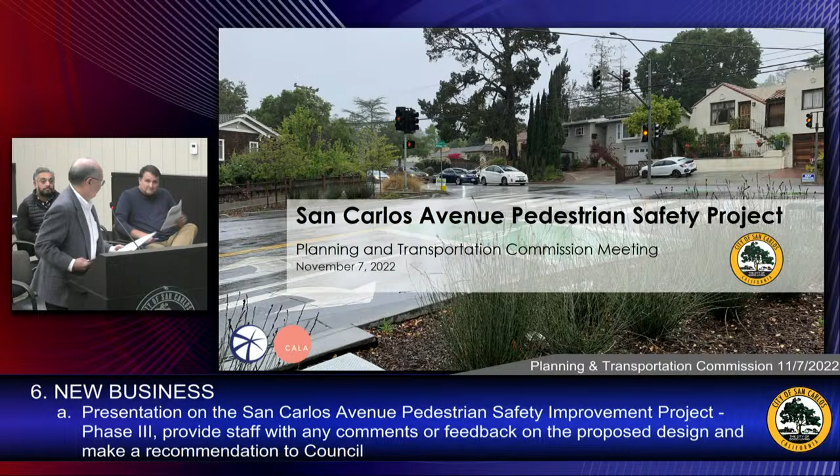Good evening, Commissioners. My name is Brian Fletcher. I'm a principal with Callander Associates Landscape Architects. I'm also a resident of San Carlos for now over, I think, almost 21 years. So it's been a real privilege for me to work on projects within my own city and my own community. So I'll walk through the project.

As you all know, this isn't the first phase of the project. There have been 2 other phases prior. But in general, the goals and objectives of the project were to increase pedestrian safety by providing a continuous public sidewalk along San Carlos Avenue, which wasn't there before.

And then to improve mobility for all community members. Sorry, I'm getting used to the new configuration here, I have not been here before. Improve the mobility for all community members.

So ADA accessibility, enhance the bike lanes, and then provide beautification enhancements where we can, whether that's street trees or stormwater planters. We have a responsibility to treat our stormwater before it goes into the storm drainage.

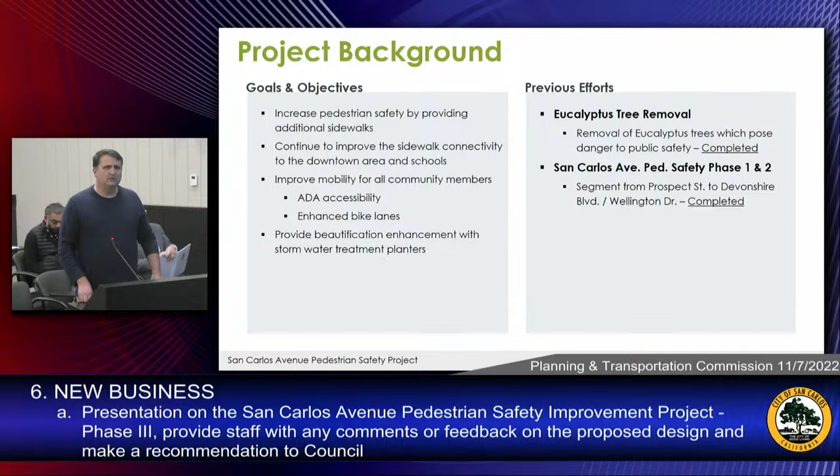So these are opportunity areas that we can not only provide the storm drainage, but also beautification as well. So as you're aware, this project has gone through multiple phases 1 and 2, but there's also been other work happening on San Carlos Avenue, multiple phases of the large eucalyptus trees that have been removed over time, and I believe we are now completed with those efforts.

So moving forward, the first 2 phases of the project: phase 1 was from Wellington Drive to Alameda. Phase 2 was from Alameda to Prospect, and those 2 phases were completed at the very same time. Those are completed out there today.

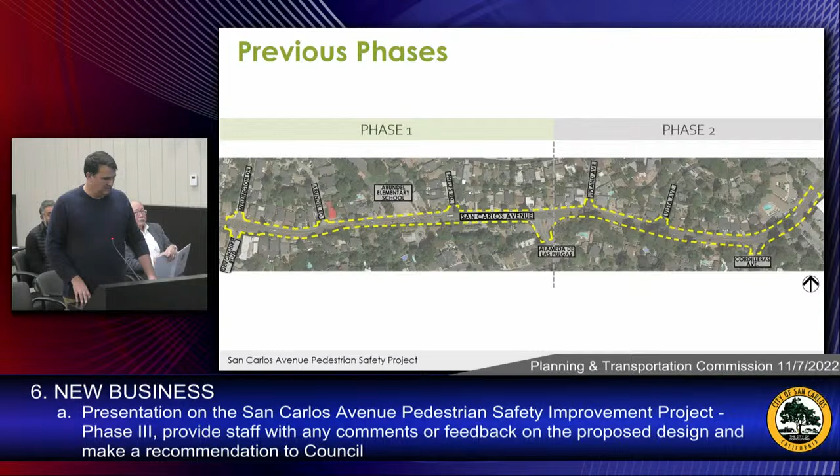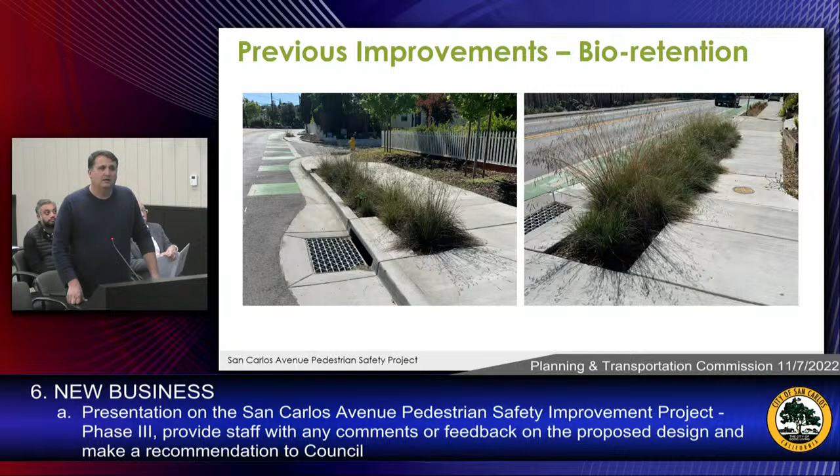And then here you can see some of the bioretention or stormwater planters that we were able to install as part of that phase 1 and 2 project.

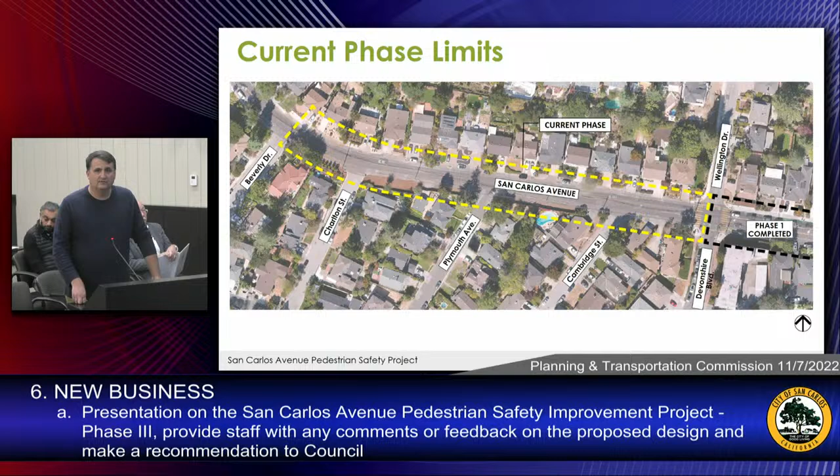So now it's time to take a look at the 3rd phase of the project, and the project limits are from Beverly to Wellington, to the limits of the previous project.

So how did we go about developing the plans that you see here before you tonight? Before we even started, we had individual meetings. We made the opportunity for people to have individual meetings with myself and members of your staff to begin to take a look at what the potential impacts would be and to provide an opportunity to provide feedback to us even before we got started into the first public workshop.

We also issued an online survey. We then presented some options at the first community open house. We took feedback and then made revisions and presented a second alternative at the second community open house as well.

We met with 12 individual neighbors. We had 62 respondents to the online survey, and we had 10 people attend the last community open house. We also anticipate additional meetings as we continue to refine the design moving forward.

So the overall response: most participants were very supportive of the general idea of the project, of improving pedestrian safety and connectivity along the corridor, as well as the improved bike facilities.

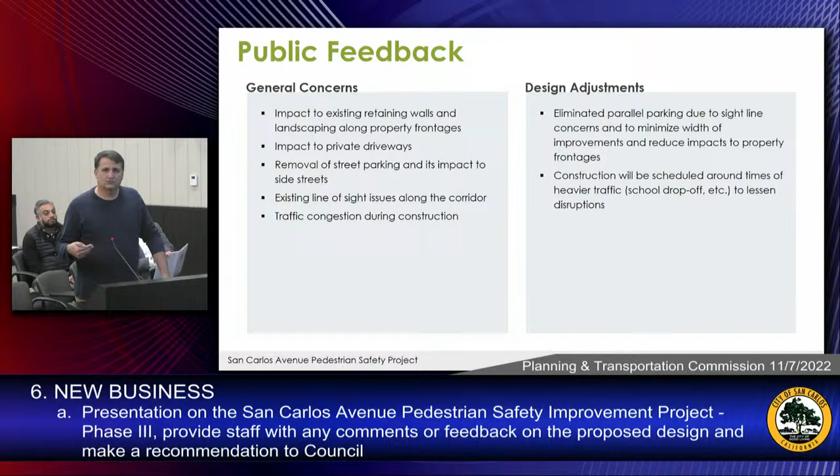The last general concern was how we're going to address congestion during construction. So we went back to the drawing board and made adjustments. We eliminated the parking that was identified there because of sight line concerns. As we move into construction drawings, we'll address congestion during construction through project staging and specifications to the contractor.

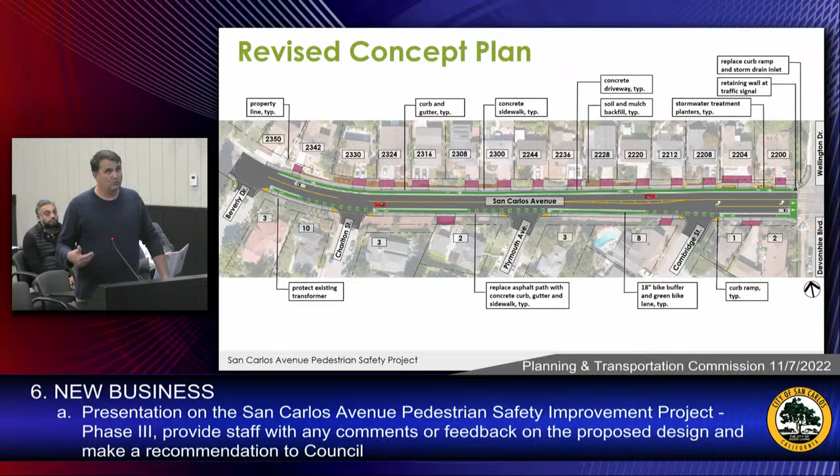Now, as I mentioned, we're going to be taking this into more detailed construction drawings, at which point we'll need to further refine the potential impacts and how we're going to reconstruct any walls that need to be removed to make way for these public improvements. We'll be taking a much more detailed look at the design of those improvements.

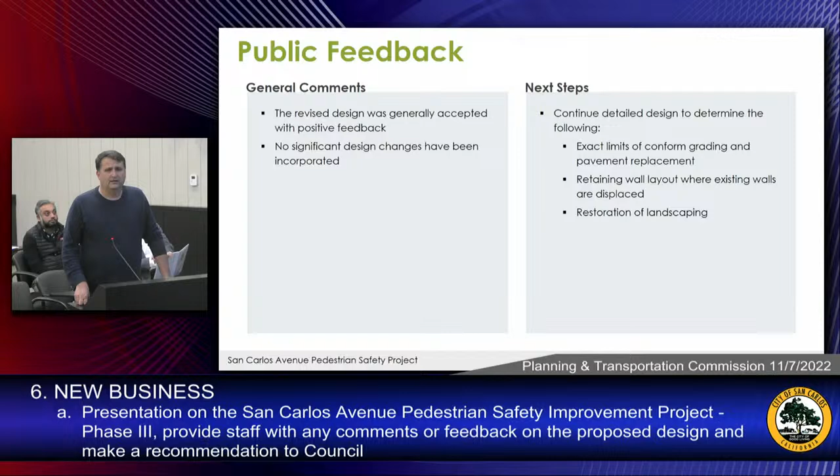So we did take it to the public, and the revised design was generally accepted without any significant design changes. As I mentioned, the next steps would be more detailed design - understanding and defining the exact limits of the conform grading and improvements to walls that would have to be removed, and then restoration of landscaping and such.

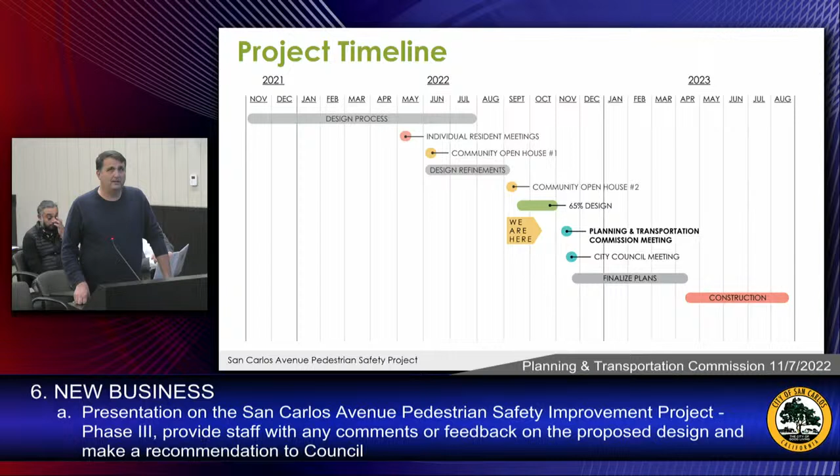So here we are with the project timeline. We're meeting roughly halfway or two-thirds here, trying to get approval on the design concept. We're going to continue finalizing the plans and construction drawings, and hopefully move into construction later next year, around April or May of 2023.

Do you want me to give this one? Or you can give this one.

I think as staff realizes, this is probably really your first opportunity to see this project. So we just wanted to get your input on the project itself - just again, conceptual. As Brian indicated, we're still in the process of finalizing some of the plans and looking at what we can and cannot do out in the field, but we wanted to get your feedback.

We really have done some extensive outreach to not only the residents who will be directly affected by the project, but also community-wide outreach to gain support from the community at large. We want to get your feedback and see what concerns you might have going forward. We'll take that information and present it to our city council, who will have a similar opportunity to discuss the plans and improvements before we finalize the conceptual or final design.

Thank you, Director, thank you for the presentation. That was very helpful. I guess I'd like to ask if there are any clarifying questions from the commissioners before we start a discussion. Yes, Commissioner Garvey.

Okay, thanks. To Commissioner Castaneda's questions, it looks like there are 16 homes affected on the handout, or at least 16 addresses are given, and I count 17 pink spaces. Could we go back to that slide? I'm just trying to understand. It looks like there are a couple of homes you maybe haven't reached to talk to them? Most certainly, there are a few homes that haven't reached out to us for individual meetings. I'm not certain they weren't at the public open house, either one of those meetings. But as far as personal one-on-one meetings, we've gone out to every single one that requested one.

And you said you left flyers for those who didn't. Thank you. Can you help me understand better what the pink on the diagram will consist of when the project is done?

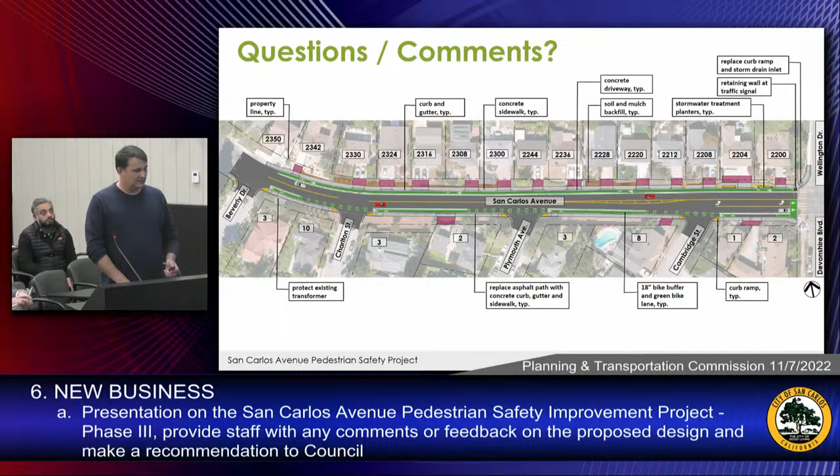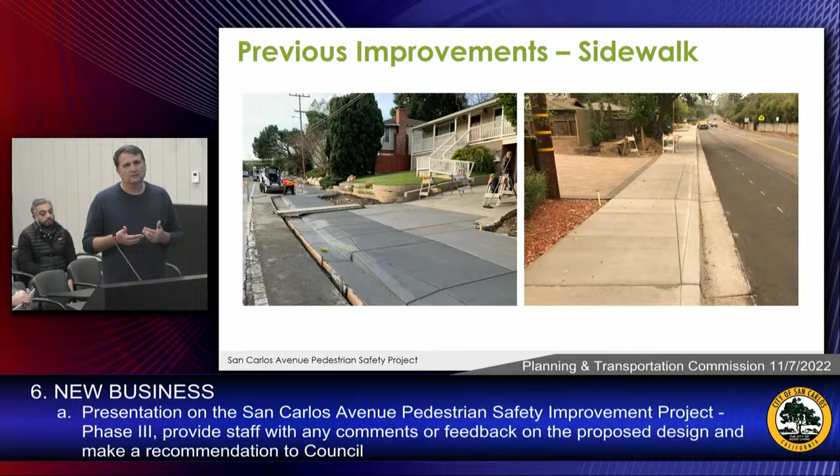Yeah, so the pink—I'll go back to one of those first phases. Do you see that image on the left? Okay, so the pink represents what we need to do on that driveway in order to smoothly conform from the existing driveway to the new limits of the sidewalk. We've got a lot of grade differences between the proposed sidewalks and some of these garages, especially closer to Wellington, so we'll be analyzing what's needed to make a smooth transition. The pink represents that conform area behind the new sidewalk that we'll need to reconstruct for the driveway. Right now it's preliminary until we get into more detailed construction drawings, but by the time we get to construction we'll have a good idea of the exact limits. Got it.

I just have a couple more clarifying questions. When retaining walls or other things erected in the right-of-way need to be removed, whose cost is it to remove those items? Just to make sure I don't misspeak—the project is going to take on the cost of removal and reconstruction, just like we did for Phase 1 and Phase 2, to put things back in general conformance with what's needed for grading. So it is part of the project.

I see. So, even though the owners have built in the right-of-way, the city has budgeted to make them whole and get the work done for them, in essence? Yes. That's very generous. Thank you, that hasn't been the case on other projects we've worked on. That's my understanding—the default isn't like that.

I have one more question related to Commissioner Garvey's comments. I know sometimes bike lanes have barriers of different types, and I wondered how the street dimensions or other factors led you to choose the buffered bike lane versus other barrier constructions. We have to look at how much improvement to the bicycle infrastructure we get and balance that with potential impacts to residents. We felt the buffered bike lane provides more protection and separation for the bicyclist than a traditional bike lane, without going to something more structured that might take more room. So that's generally why we chose the buffered bike lane.

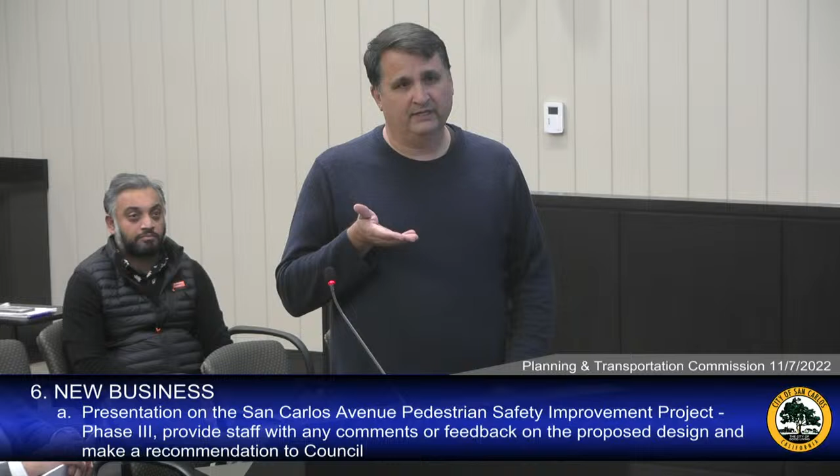Got it. It looks like the south side has far fewer entrances to the street, which would be a better candidate, but it would be hard to do. Yeah, and on this one, the north—we've got a pretty straight shot. If you remember on Phase 2, as you're coming towards Cordilleras, we actually elevated the bike lane a bit because cars were cutting into it there, so we wanted more protection there. On the straight shots, generally people behave a little better.

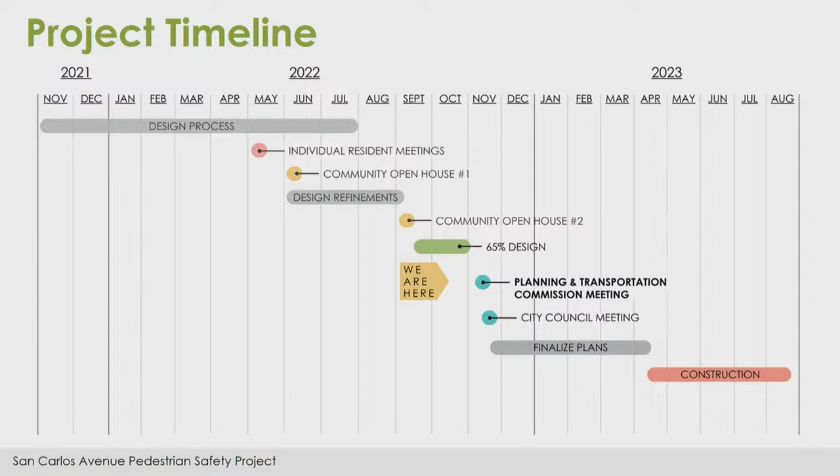Could you put back up the calendar, please? Just trying to figure out which fiscal years we're going into. It looks like construction will be late spring through the summer, potentially next year. Have all of the funds been budgeted for Phase 3, and are they in the 22-23 budget, or is that going into 23-24 also? The budget is actually allocated for this fiscal year, but we'll carry it over into next year.

Capital projects, right? They take a while. I understand. Do any other commissioners have clarifying questions? Yes, Commissioner Garvey, just one additional question.

Thank you, Chair. On all those properties on the north side, Brian, do they all have sufficient parking available on their properties to park 2 cars? Or do some people only have enough space to park 1 car and they were parking that second car on the street? I think they all have garages. I don't think they all have garages. Some of the driveways, maybe a little. I'm just looking at the drawing that you can see here. Most of them look like they at least can fit 2 cars within the driveway. There's a few that may not, but they also do have garages.

All right, thank you. And this doesn't prohibit them from making an application to widen their driveway either, too. Oh, good point. Okay.

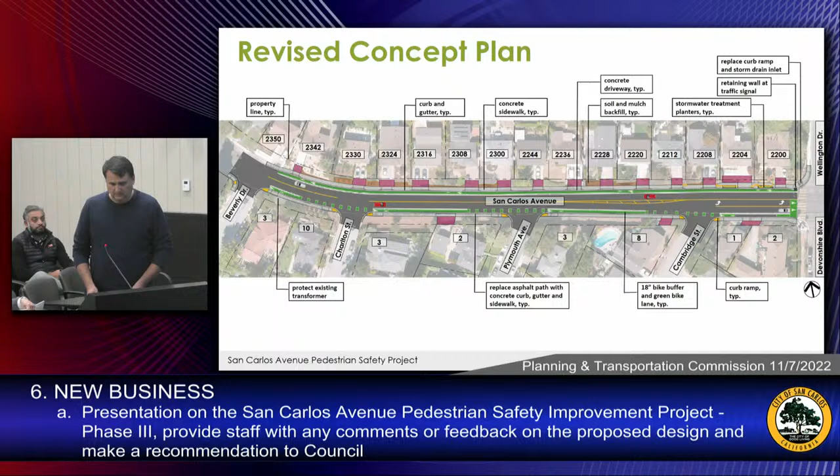Great, thank you. Any other clarifying questions from the commissioners? No? If not, I think we'll go to public comment then, to see if anyone in the community has something they would like to comment on. So if you'd like to make a public comment on agenda item 6A for 7 - I think that's a typo from another meeting - on the San Carlos Avenue Pedestrian Safety Improvement Project, Phase 3, now would be a time to speak.